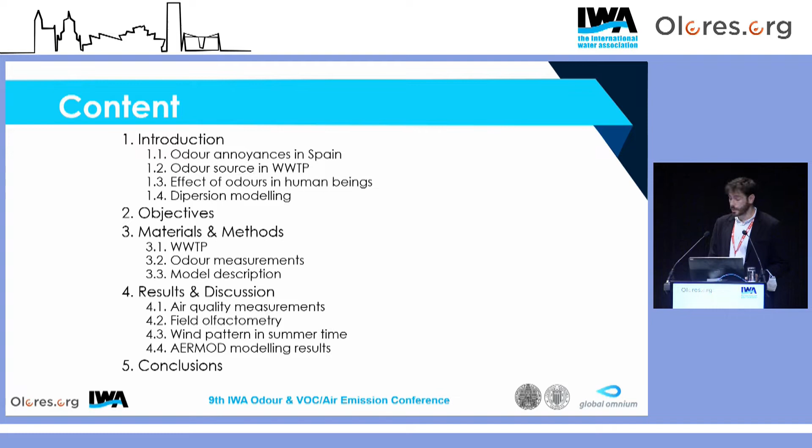Here you can see the content of the presentation, and now we're going to go through the introduction just to put the work in context.

After 2 days of presentations, all of us know that nowadays we have an increasing concern about odor complaints, mainly because of wastewater treatment plants.

Despite that, there are no specific laws in Spain at the national level. We have some data about complaints in the country, shown here on your left, mainly focused in some places, probably in the south. This data was collected by the National Statistics Organism, done in the past during the population and housing census, though I think it's no longer being collected. Even with this data, probably the situation nowadays is worse than in 2001.

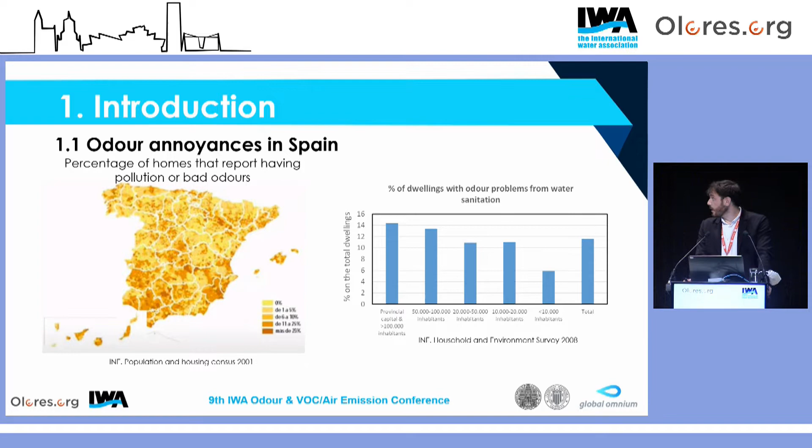We also have some data about complaints due to water sanitation. The main part of the complaints come from populations higher than 10,000 inhabitants.

The non-mitigation of odor complaints results in these complaints and references in newspapers.

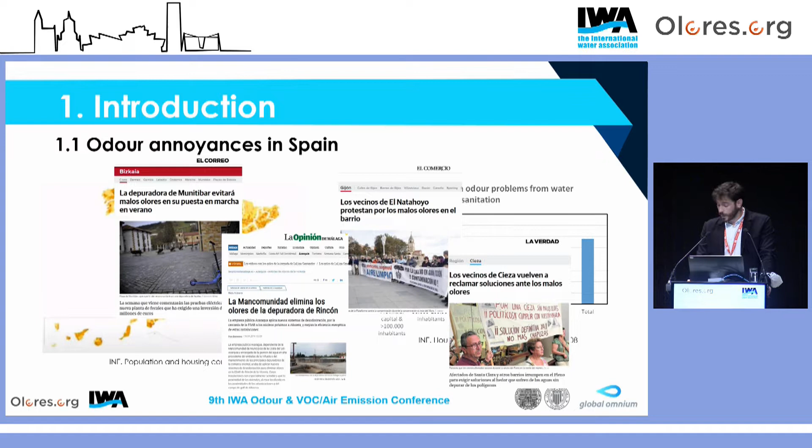As already mentioned during these days, the main odors in wastewater treatment plants are caused by H2S, ammonia, and organic compounds. The main part of H2S is produced in the pre-works or pre-treatment of the wastewater arriving at the facilities, and this is the main compound that causes odor annoyance, because it has a very low threshold.

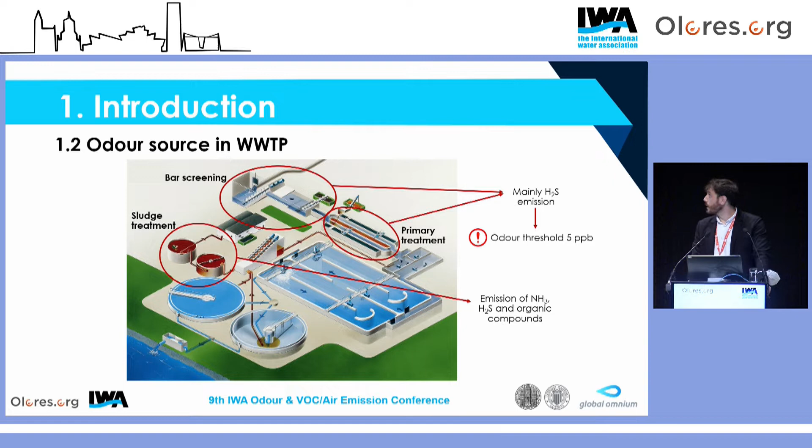This threshold is about 5 ppb. The effects of odors have an impact on health, causing stress, anxiety, and irrational attitudes, and also cause a poor image for facility managers.

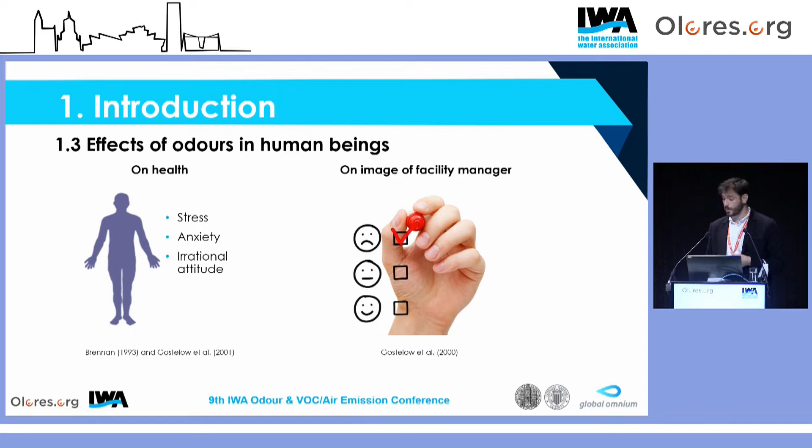Because of this, we have to find a solution to mitigate these odors, and this solution has to be ad hoc for each facility. One tool for developing this ad hoc solution is the use of models. In this work, we used the AERMOD model.

This is a Gaussian steady-state plume model. It enables diagnosis and prediction in complex terrain and is useful for wind flows higher than 0.28 meters per second.

The main objective of this work was to determine whether or not mitigation measures are necessary to protect adjacent dwellings from odors. The secondary objectives, to achieve this main objective, were the identification of odor compounds and the sources of these odor compounds.

Also, to establish the correlation between the odor or compound found and the annoyance reported by the neighborhood, the implementation of mitigation actions, and to verify the upgradings done in the wastewater treatment plant to mitigate these odor emissions.

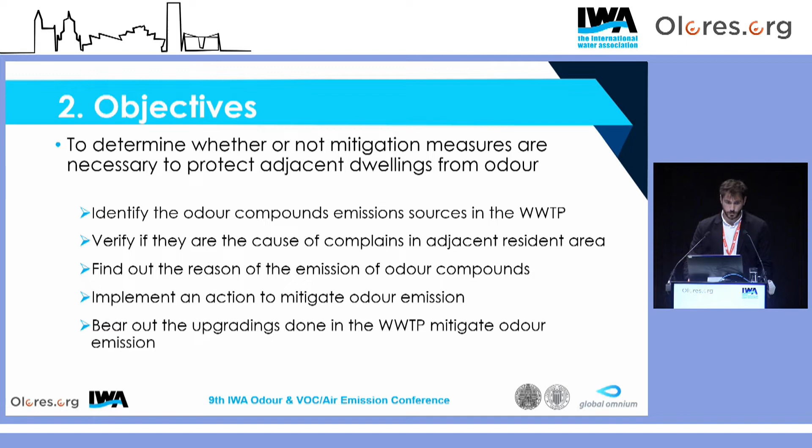First, I would like to describe the wastewater treatment plant we worked with. It was close to the sea, about 300 meters away, and very close to the houses, only 14 meters. This plant was quite small, treating about 300 cubic meters per day of wastewater. It was composed of only one bioreactor of 22 meters diameter, one settling tank of 12 meters diameter, and 7 drying basins not operated during summer, from June to September.

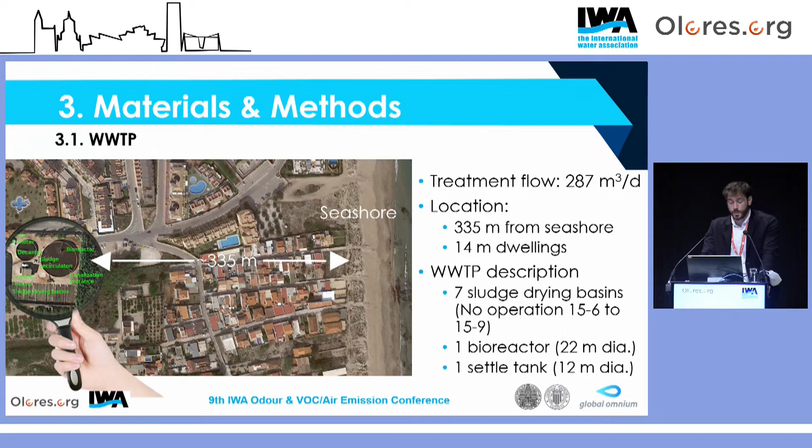For measuring odor, we used two different methods. One was field olfactometry, using a Nasal Ranger device. This uses dilutions with panels that are calibrated, and depending on the calibration, we can achieve different concentrations. In our case, we worked between 2.5 and 70 odor units per cubic meter, depending on the panelist making the measurement. We did these measurements at several points inside the wastewater treatment plant, also close to the area of the complaints, and at another point, a pumping well, which we presented in a poster outside.

We also made measurements with Polytron 1000 devices that measure H2S, with a measuring range from 1 to 100 ppm. We used this mainly to try to measure H2S produced at different sources within the wastewater treatment plant.

We also measured at the perimeter wall of the wastewater treatment plant, just to see if we had concentrations higher than 1 ppm in this area.

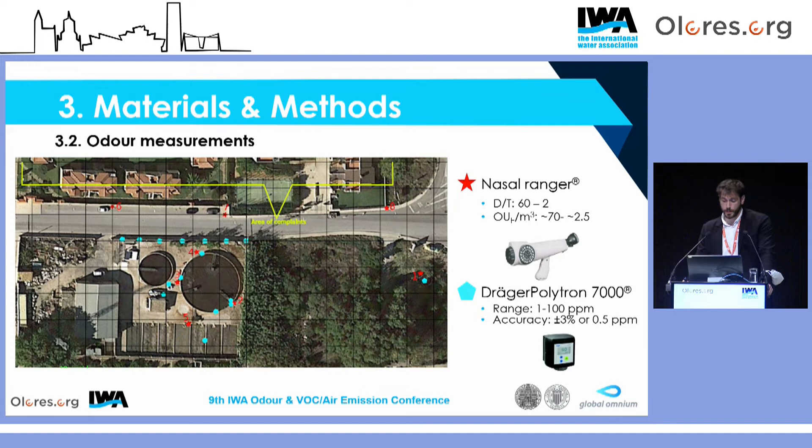Here, more or less, the description of the model. We have used our model as I said before, with a 6,400 points receptor grid with a cell size of 2.5 meters, and a total length of 200 meters.

The meteorological data we used in this work needed to be very accurate, so we found it from the Valencian Association of Meteorology, that's AVAMET, and also from a local windsurf club, Wind Guru, that has a meteorological station.

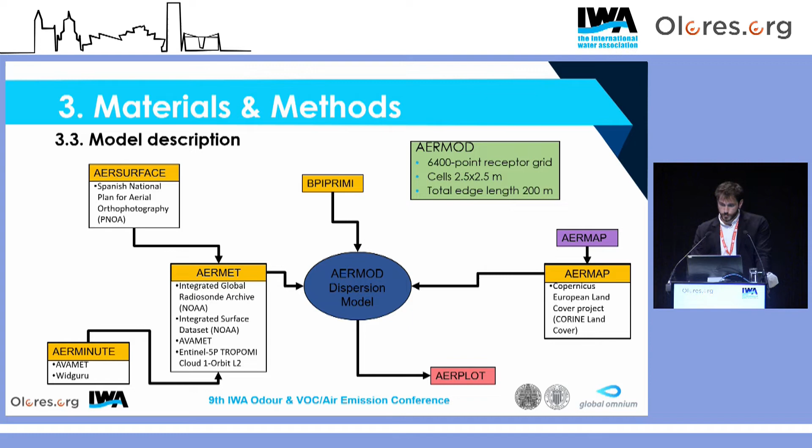So what we found during our work, this is the first result, that air quality measured with the polytron showed that all measuring points had measurements below the detection threshold, except the inlet, where we found concentration up to 50 ppm.

On your left you can see the emission pattern, and you can see that emissions are mainly produced during the afternoon and evening. If we look at the inlet water flow to the water treatment plant, this is the pattern for this parameter. You can see that the main part of the flow also comes into the plant during afternoon and evening, so there's a correlation, it was pretty much the same.

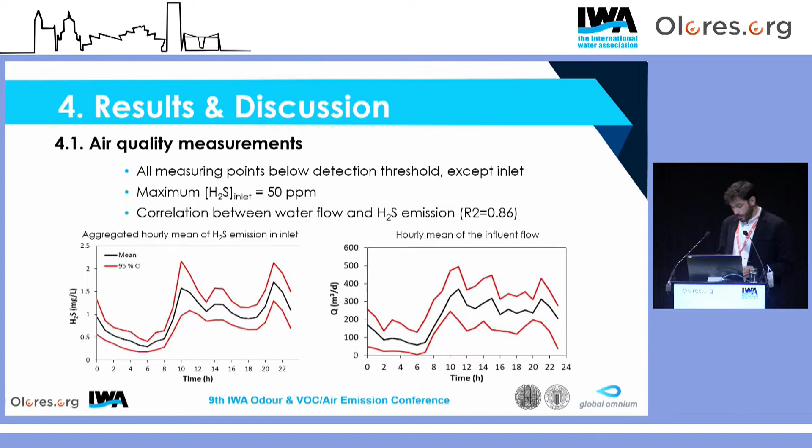So we found the point where the measurement was produced. This is before any action to mitigate the odor. We found that the inlet of the wastewater plant was open air with a fall of water, and here we have venting of H2S, and this is the origin of the complaints.

In order to mitigate this problem, what we had to do was install a rotary screen to avoid solids coming into the reactor, and also submerge the inlet.

Here you have the results of olfactometry measurements. Just to highlight, these olfactometry measurements corroborate the air quality measurements we did with the polytron. The main concentration we found was in the inlet of the reactor, which we showed in the previous part of the presentation.

And also in the pumping well, which is shown outside in a poster. We can also see here that at 20 meters distance, more or less the size of the biological reactor, the concentration of odor is reduced to values less than 7 odor units per cubic meter.

Just to highlight also that we found odor in the street in these measurements. It was one of the points close to the residential area. This was caused by traffic, not by the wastewater treatment plant, it was not correlated with the odors from the plant.

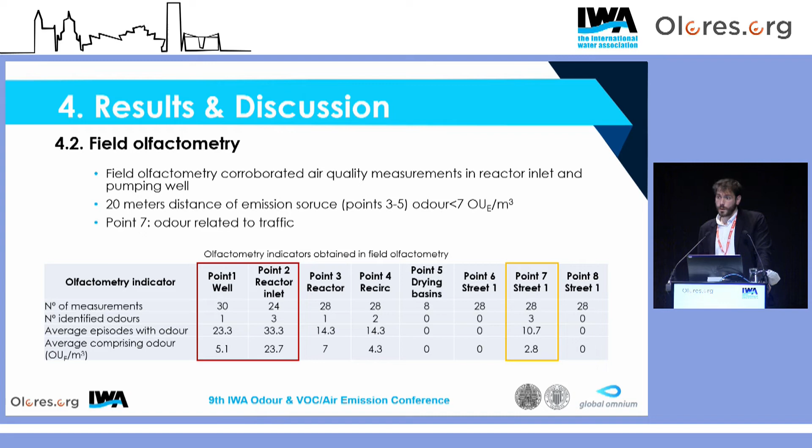Another input to the model is the wind pattern. The study shows here on your left the wind rose. Most of the time, wind was blowing toward the residential area. Here is the wastewater treatment plant, here is the emission point of the inlet, and we can see this direction is like contrary, the wind is blowing directly to the residential part where the complaints were made.

Also, we found that the wind speed was higher also during the afternoon and evening, so this was very unfavorable for solving the problem with the complaints.

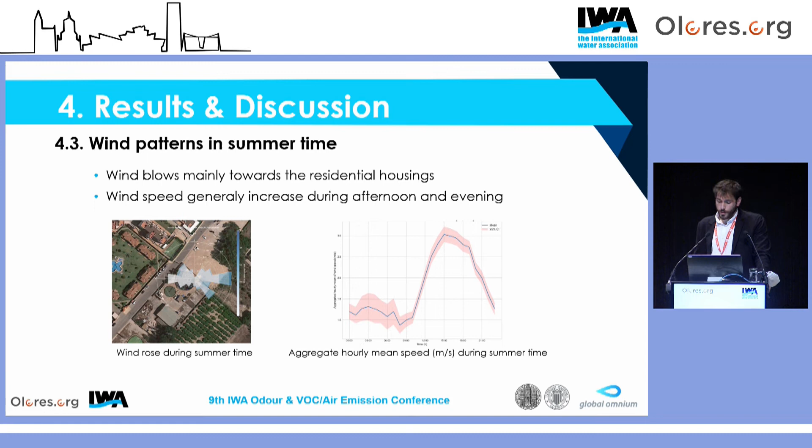Finally, here we have the results of the model. We found only two timestamps with H2S concentrations higher than 5 ppb in the residential area, that's the odor threshold of this compound. We need a concentration at the source of the odor higher than 7 ppm just to find this kind of concentration in the residential area.

Also, we found that after submerging the pipe of the inlet in the wastewater treatment plant, there is no modeling result showing concentration higher than 5 ppb in the residential area. So the problem of odor in this part of the city was solved, almost entirely caused by the wastewater treatment plant.

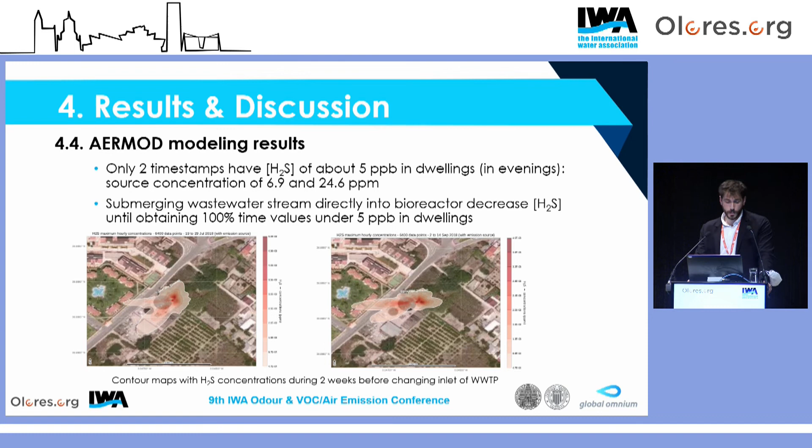So the final conclusion is that modeling was shown as a useful tool for odor annoyance management in wastewater treatment plants. I have to remind that this was a small one, so there wasn't a big budget to solve these kinds of problems.

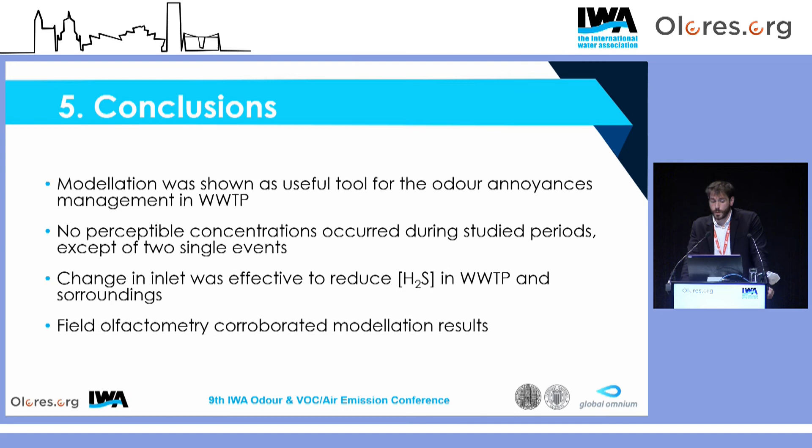There were no perceptible concentrations occurring during the study period, except two single events. So more or less the problem was not very high, but in the end we solved more or less the problem we found at this installation. The change in the inlet configuration was effective to reduce concentration of H2S in the wastewater treatment plant and surroundings, and field olfactometry also corroborated the modeling results.

Here you have my contact details in case you need more information or would like to know something about this. Thank you.

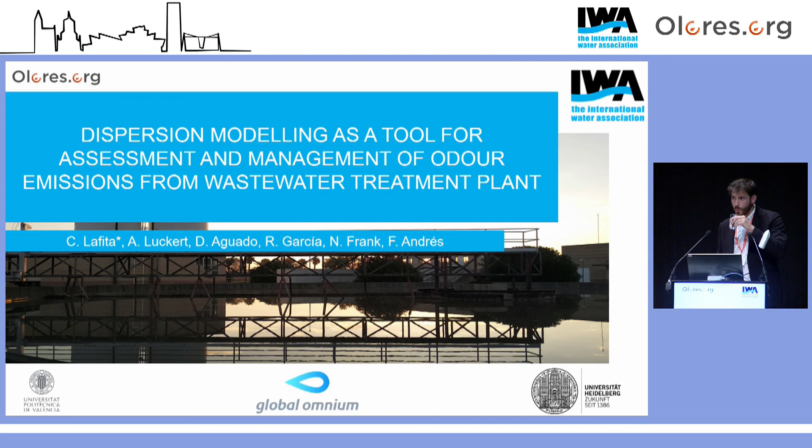Thank you very much, Carlos. We are very late, so we have only time for one question, if there is any from the audience. No questions? Well, I have one, very simple, just a confirmation, because probably I didn't get it completely.

The dispersion model was run on the H2S concentration, so it used the H2S concentration as emission data, right? Yes. And the field data obtained with field olfactometry were used as a comparison, is that correct? That's correct. Yeah, we used as input to the model the H2S data from the polytron, and also the wind data.

Field olfactometry was just used to corroborate this data from the model and to see if the problem of odor annoyance was as important as we thought. Okay, thank you very much. Thank you.